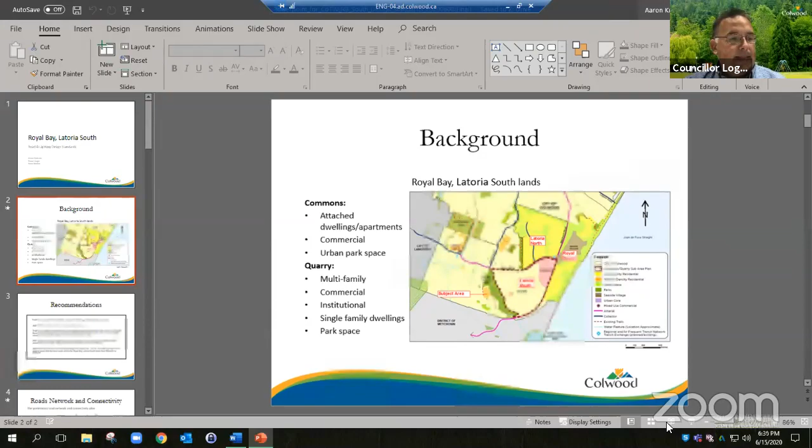It's having a little technical difficulty. It seems to want to move to my second slide. Okay. All right, yes, so I'll be presenting the Royal Bay Latoria South Design Standards. Myself and Brent Molnar will be available for questions after the presentation. So I will get started.

The developer of Royal Bay Lands is proposing specific design standards for the road design and street lighting, which will be applied to the internal road network of the Latoria South lands. The location of the lands we're speaking about tonight can be seen here in slide 2, outlined in the red dashed line. The subject lands are separated into two large areas at the moment, referred to as the Commons area and the Quarry. The Commons is intended to have attached dwellings, apartments, commercial units, and urban park space, whereas the Quarry will have single-family dwellings, attached dwellings, apartments, non-residential units such as an elementary school, and open park space.

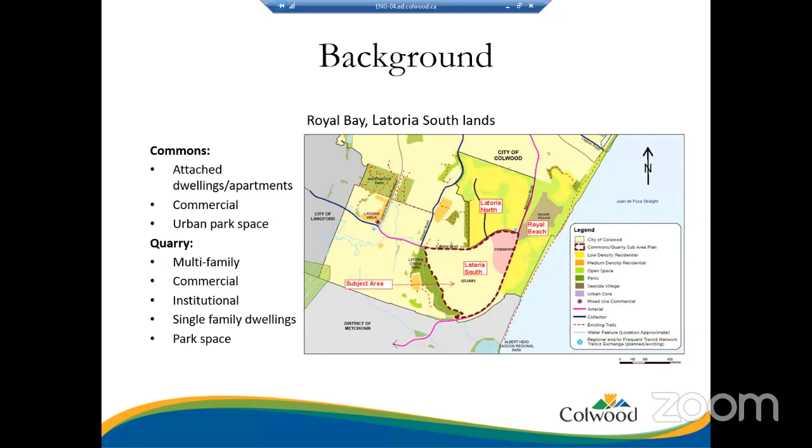Staff is recommending that the report titled Royal Bay Latoria South Design Standards be received, and that committee consider recommending to council that the road design standards and street lighting standards proposed in the June 15, 2020 staff report titled Royal Bay Latoria South Design Standards be accepted as the road and lighting standards within the Royal Bay Latoria South development lands. And that Colwood Subdivision and Development of Land Bylaw 1995, Bylaw 285, be amended to add specific design standards for Royal Bay Latoria South lands. And further that the Colwood Speed Regulation Bylaw number 1612 be amended to reduce the posted speed limit for local roads within Royal Bay Latoria South lands from 50 kilometers an hour to 40 kilometers an hour.

All right, next we move on to the road network and connectivity. The developers are proposing specific road design standards to enable the Latoria North and South lands to have a similar look and feel, to modernize the road standards, introducing more multi-use pathways, and lengthening and expanding parking areas within residential and commercial areas.

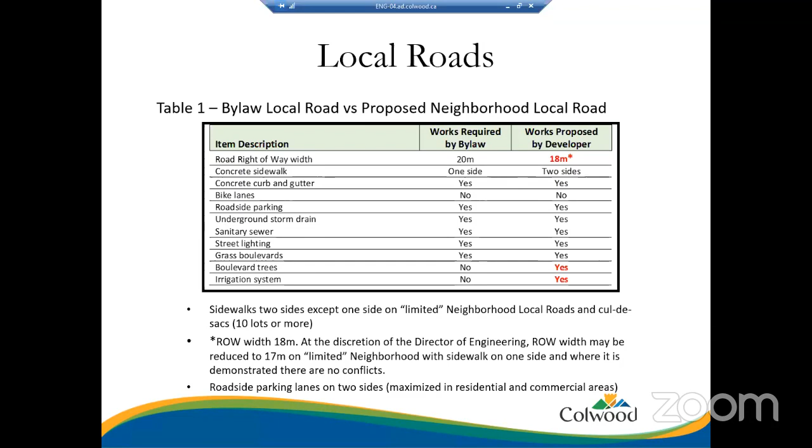So here we have the cross sections from the bylaw, as well as the proposed cross section for the local roads. You can see what I was speaking about - we've got these parking lanes here on the proposed local road, so parking on both sides, and we've got the 1.5 meter sidewalks on both sides. And then for the limited local, you would only have the one side as a 2-meter sidewalk.

And then we come to the local road cross section from the TMP. You can see that there's sidewalks on both sides at 2 meters, as well as a 6.5 meter wide roadway and 2.5 meter buffers. The buffers could imply that we could do parking on both sides, but they wouldn't necessarily be paved, or it could be a shoulder.

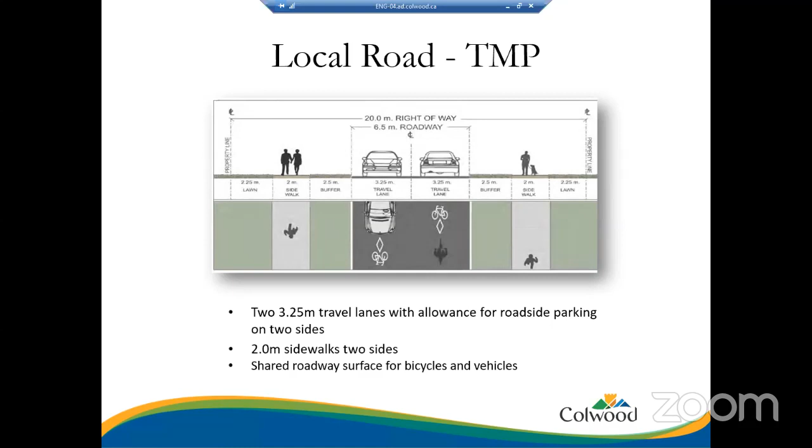Moving on to collector roads. Table 2 shows the proposed works largely meet or exceed Colwood's bylaw. They are proposing a 3.5 meter wide multi-use pathway on both sides of the road in place of the standard sidewalk and bike lanes. The multi-use pathways would consist of a 1.8 meter wide walkway and a single direction 1.7 meter bikeway, to remove some of the conflicts that can arise when you've got two bi-directional bikeways on the same side of the road. The use of multi-use pathways is supported by the Transportation Master Plan, which speaks to multi-use pathways separated from streets to encourage pedestrian and cycle activity and provide mobility choices.

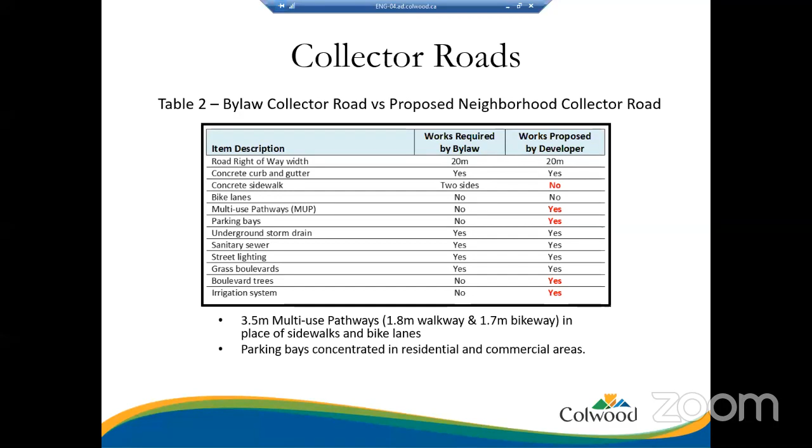The lane widths would increase from 3.3 meters standard to 3.5 meters at intersections to allow for BC Transit bus movements. As well, there would be roadside parking bays, concentrated in front of residential and commercial areas.

Here we have the collector road sections: the section from the bylaw, as well as the neighborhood collector road proposed for Royal Bay. Right off the bat, you can see the designated parking bays, divided up differently than the bylaw. The bylaw just calls for one 12-meter wide surface, with no necessarily designated parking bays or bike lanes. Here you can see the multi-use pathways, the 1.8 meter walkway and the 1.7 meter bikeway, separated by a boulevard and a curb.

Table 3 shows the works required by bylaw compared to the works proposed for a commercial collector road, which is what I earlier referred to as Commons Road, in the commercial hub of the Commons area. 2-meter sidewalks are proposed on both sides of the road. Roadside dedicated parking is proposed with angled and parallel parking types. The angled parking is intended to maximize parking in front of the storefronts for customer parking. Bikes are intended to share the road surface with vehicles, and the lane width has been increased to 3.5 meters to help accommodate that. As well, we would get boulevards with typical trees, irrigation, and allowances for street furniture.

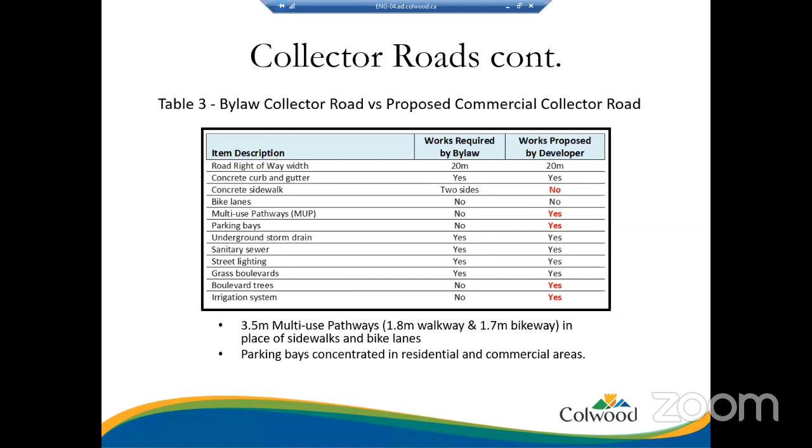So here we have the collector road again from the bylaw, but the commercial collector road cross section here shows the angled parking, and then we would still have the ability for parallel parking where applicable and where it fits, and then we would have the 2-meter sidewalks on both sides. We've asked for bollards to be provided to ensure there's no encroachment of those sidewalks from the parked vehicles. You can see here where we've widened out the lanes just a little bit more to help with that shared surface.

All right, and then we're on to the collector road from the Transportation Master Plan, which is obviously very different from the commercial proposal with the buffered bike lanes. But you get the 2-meter sidewalks on both sides, and we will have boulevards. The reason for developing the specific road standard for the commercial was really to provide an ability to close off a section of the road to host public events, like an outdoor market. So we were looking at sort of a Woonerf type feel. We tried to remove a lot of those conflicts and enable us to close off a nice wide asphalt surface, with some brick implemented into the design. So that's the reason for the special case for the cross-section for the commercial.

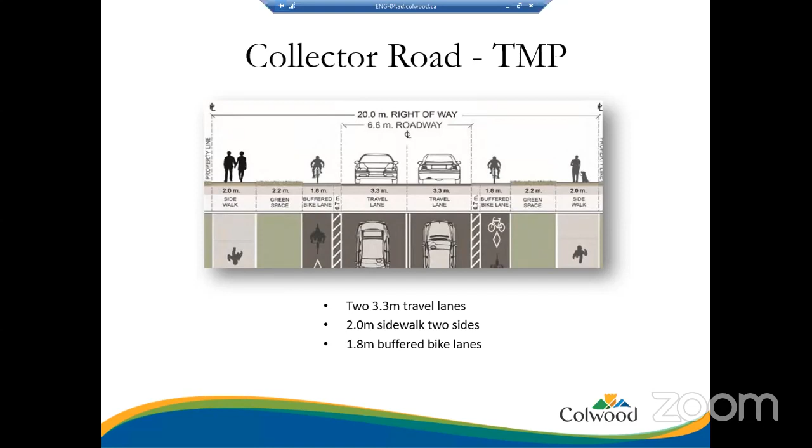Then we're moving on to table 4, where we're comparing the works for an arterial road required by bylaw versus the proposed works for a 2-lane section. You can see that the proposed works either meet or exceed the bylaw requirements. I would say the one item that's largely different is the right-of-way width. We typically require a 25-meter right-of-way for arterial roads, and the developer is proposing a 20-meter right-of-way in this case.

We have sidewalks on both sides in both cases. They're proposing bike lanes for the arterial road, where our bylaw just shows a very wide section of asphalt, without any dedicated bike lanes. And again, you get your boulevard trees and irrigation.

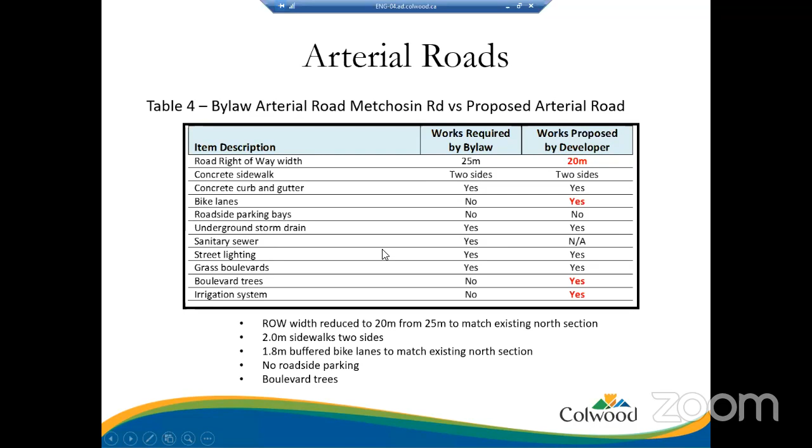And here are the cross sections for the arterial roads for the 2-lane. Here's the bylaw cross section, and that's where I was speaking to, the 14-meter wide asphalt surface. Not much delineation there. Whereas here we're going to have 2 3.3-meter lanes, the 2.5-meter buffered bike lane, so that's 1.8 meters of bike lane with a 0.7 buffer, and then you get your 2-meter sidewalks on both sides, boulevards with trees.

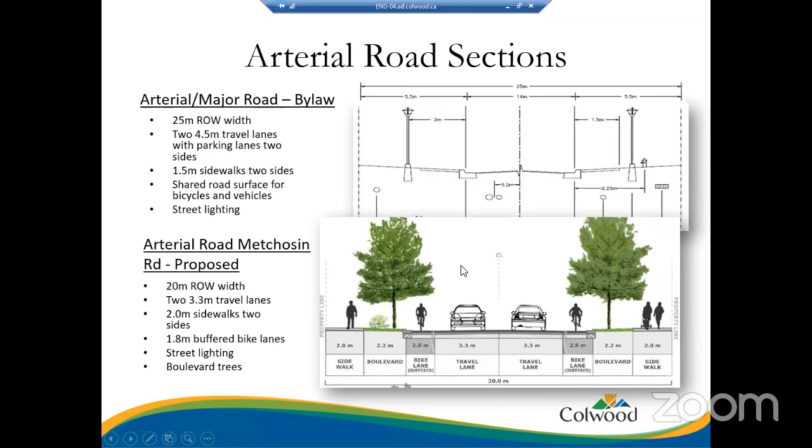And table 5, we are now comparing the required works for an arterial road versus the proposed arterial road for a 5-lane cross section. So this is basically Latoria Boulevard. We're again looking at the right-of-way width, 25 meters typical, and now we're increasing it to 27.5 meters to fit those 5 lanes.

Again, we're looking at multi-use pathways, so there's not a specific sidewalk, but there will be the 1.8 meter walkway and the 1.7 meter bikeway. We'll have a center median, which will also act as a center turn lane where necessary. The center median will have trees and mostly grass and a little bit of hard surfacing.

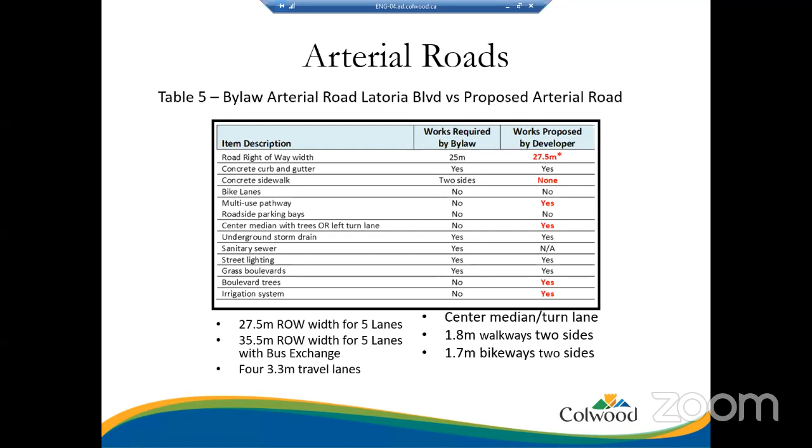This road right-of-way will have to increase to 35.5 meters, but it's only for that localized section. It's not going to be a continuous 35.5 meters.

All right, moving on to the arterial road as represented in the TMP. The 2-lane arterial above is very much like the collector road, really no difference. The bottom image here is our sort of standard 5-lane cross section. And the big difference being the outside lanes are shown as 3.1 meters, and that was because they could sort of borrow some of this space for the bike lane buffers.

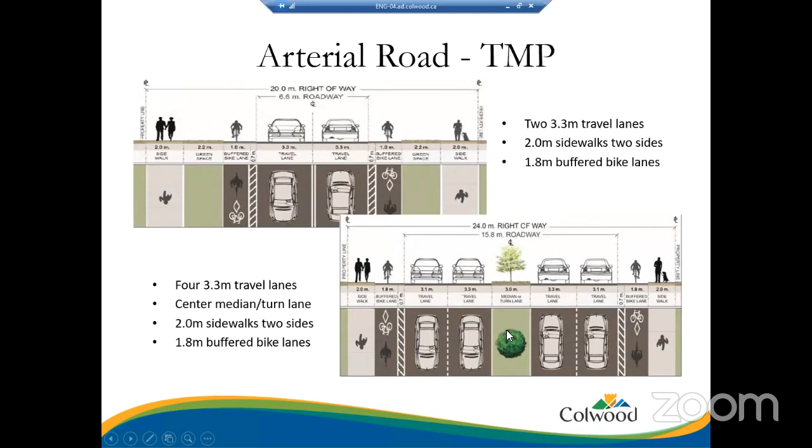Here we're now discussing the proposed changes to the speed limit on the local roads. The developer as well as staff are proposing a reduction of the local roads from the standard 50 kilometers an hour, which is specified in the Colwood bylaw number 285, to 40 kilometers an hour for the through local roads. So that would be the main local, as well as the limited locals and the cul-de-sacs.

They would all be 40 kilometers an hour. Now they would have to be signed as 40 kilometers an hour. As well, we would require a bylaw amendment, I believe it's bylaw number 1612, to change the standard specified speed limit for local roads within the Royal Bay lands specifically.

In discussions with staff, we've come to the understanding that other municipalities in Victoria and Saanich are considering or have already implemented some changes to reduce speed limits within neighborhood local roads to 40 kilometers an hour and even 30 kilometers an hour in some cases.

We're supporting the proposal to change the speed limits to help with reducing speeds within the neighborhoods and to sort of balance out the speed of the vehicle and the cyclist, so there's less conflict. As well, it would help with pedestrians crossing the road and such. I think that's it for the speed limit changes.

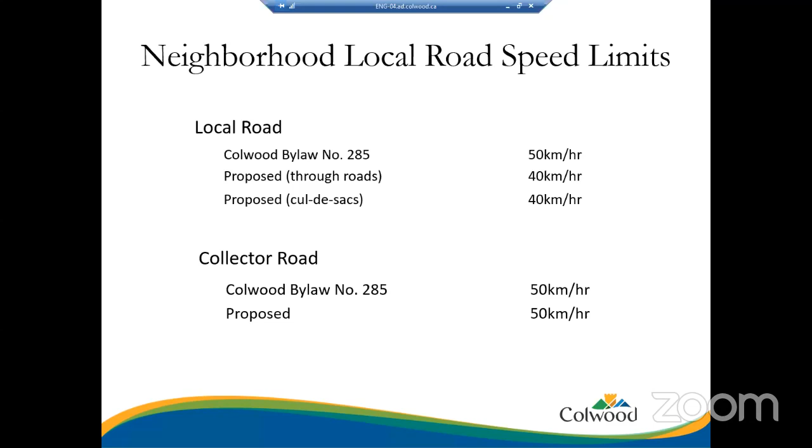Now we're moving on to the street lighting. Royal Bay actually has been using Lumec LED street lighting on the Northlands for some time now. They were accepted through the design standards approval for the Northlands. However, the lighting standards were never formally inserted into a bylaw.

So staff would like to take this opportunity to include the lighting standards now in with the Royal Bay Latoria South standards. The color of the poles will be the black blue that has been used already in the Northlands and throughout Colwood.

So staff can make the following conclusions from the proposed design standards. The proposed road design standards largely meet Colwood's intent for the transportation master plan, as well as the official community plan, by providing safer sidewalks with multi-use pathways, improved pedestrian and cycling connectivity, and different mobility choices for the community. The design standards would be specific to Royal Bay Latoria Southlands and added to the bylaw as an appendix or schedule.

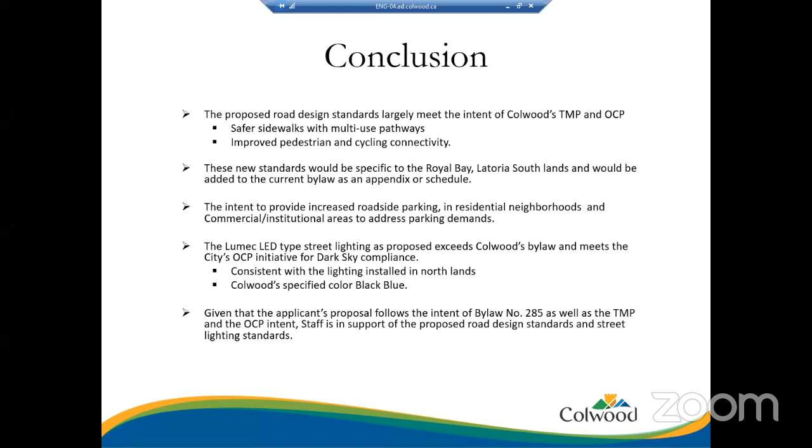So in closing, I'd just like to repeat the options and alternatives available to us. We're looking to direct staff to approve the proposed road design standards and street lighting standards as provided in Appendix A, Royal Bay Latoria South Design Standards.

And direct staff to draft an amendment to Colwood Subdivision and Development of Land Bylaw 1995, bylaw number 285, as amended, by adding the specific design standards for the Royal Bay Latoria Southlands to the bylaw as an appendix or schedule, and direct staff to draft an amendment to Colwood Speed Regulation Bylaw number 1612 by reducing the speed limit for local roads within the Royal Bay Latoria Southlands from 50 kilometers an hour to 40 kilometers an hour, specific to the Royal Bay Latoria Southlands.

Or alternatively, the proposed road design standards and lighting standards not be accepted as the road design standards within the Royal Bay Latoria South development lands, and the Transportation Master Plan be applied as the road design standards instead. And direct staff to maintain the 50 kilometer an hour speed limit specified in the Speed Regulation Bylaw number 1612 for the local roads within Royal Bay Southlands.

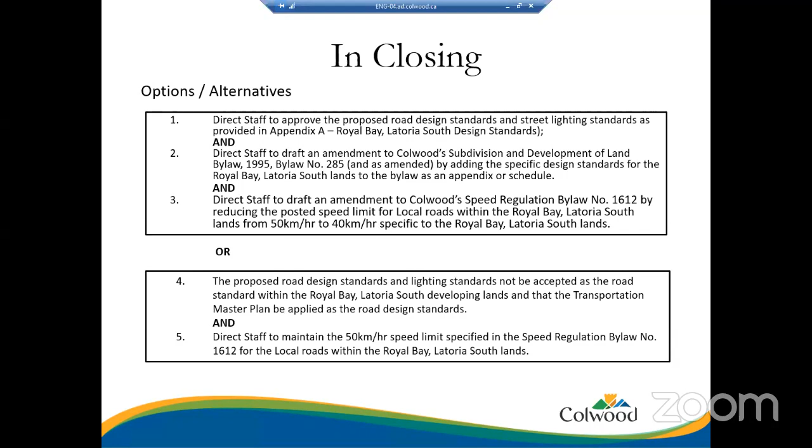I'd like to point out that we actually have Ben Mycroft, Lance Fleur from Gablecraft, Matt Pike from On Point, and Dan Huang from Urban Systems, who are all available on the call for questions, if there's any questions at this time.

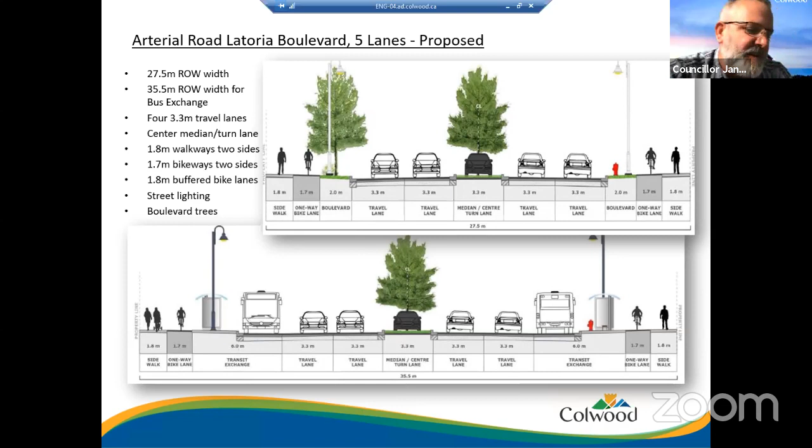Sorry, Councillor Jansen, I see that Ben Mycroft has his hand up. He might be able to answer. Sounds great. Ben?

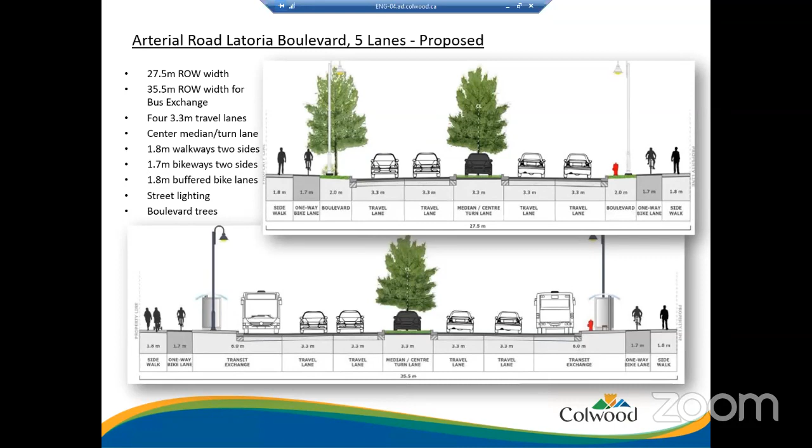Yes, thanks, Chair Logan. I just wanted to make a comment in response to Councillor Jansen's comment and question around the planters. We've heard from the public clearly that the maintenance on those has been challenging. And so what we've done is on the south side, on the Ryder extension, we've actually converted all of what would have been planters over to parking. So now we've got parking on both sides instead of just on the one side, which I think is contributing to the parking issue there in front of the school. And so we're just trying to maximize all our parking opportunities now.

I saw that in some of the diagrams, and I think that even if it ends up being overbuilt for a number of years, I think that will pay dividends into the future when we are attracting more commerce down to that area.

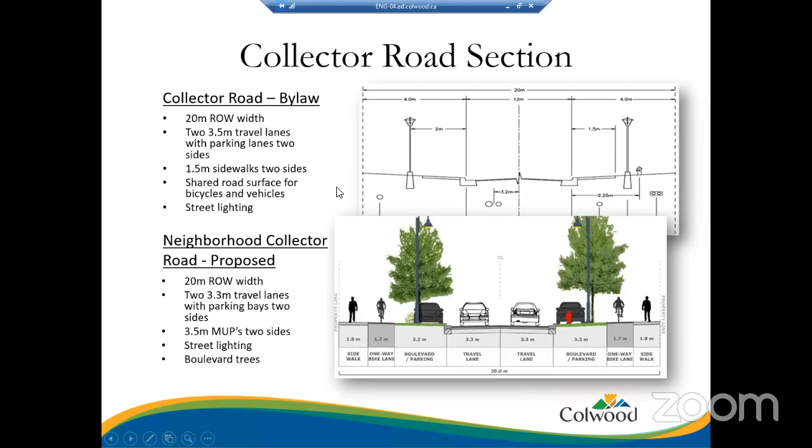Yeah, and that's the reason why we've got through the commons, we've got this section all wrapping through the commons roads, and that's to allow for significant on-street parking opportunities, basically to be a sort of surge parking capacity for some of the off-street parking. In case there's any worries, it's just having a lot of parking in that commercial area. It seemed to be important.

That's great. I appreciate that.

Now this next bit, I'm not sure who we throw this at, Chair Logan, but I start to get concerned when we're reducing the widths down to, I see 17 meters, and I'll tell you my concern.

Councillor Logan and I were walking just last night down in the Caspian area, enjoying the neighborhood. It was replete with children and pets and people walking, and it was a lovely evening with no wind.

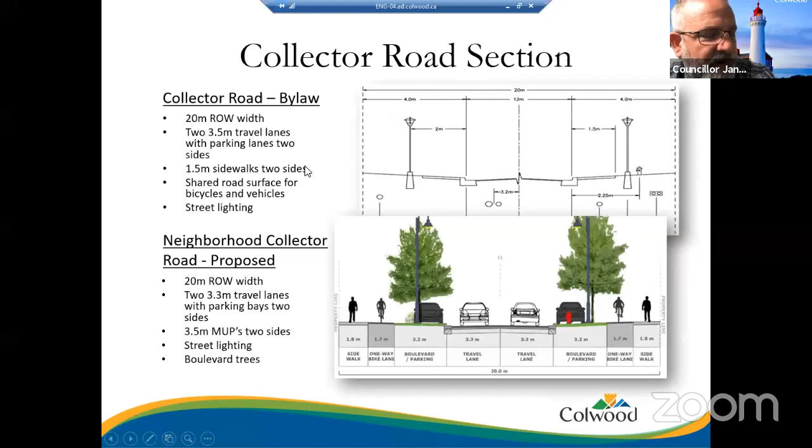What we found or encountered was parking on both sides of the road, which is great. However, my concern is if we get down to as narrow as 17 meters with parking on both sides of the road, I'm going to bet that we would have a tough time navigating a piece of fire apparatus, especially the tower truck, through that confined space.

And then the other piece is, as we get narrower, visibility for drivers becomes restricted. I think it's more a cautionary note than anything else, because I do like all of these proposals, but I think maybe that's a message for Brent. I think when we're getting down to 17 meters, we're getting fairly narrow.

Thanks, Councillor Jansen. I see both Brent and Matt Pike wish to speak. So Brent, did you want to go first?

Thank you very much, and through the chair, Councillor Jansen, thanks for your concern. Road standards on local roads have been reduced in other areas to lower than 17, but regardless, your concern is definitely noted. One of the factors we address at intersections is making sure we don't have situations too tight. Plus, we run through all of the lanes, intersections, and cul-de-sacs with our fire truck turning movements to demonstrate that they can be made.

And as we go forward and continue to develop not only the works but the cross sections as they're applied, that's exactly what the consulting engineer will be providing. We'll take that to Fire Chief Cassidy for his comment and query as well. Got it, thank you.

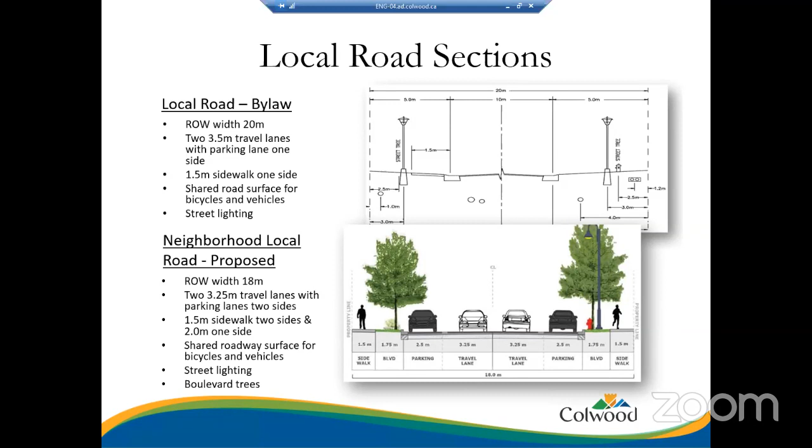My concern with that is that there are several communities within Colwood, for example, the Esquimalt Lagoon area, who have made several requests to the city to lower speed limits on Lagoon, on Milburn, on Heatherbell, down to 40. Part of the rationale for not doing that was that there was a financial consequence to doing that. So I'm concerned about changing some areas within Colwood to mirror that, but not allowing other areas suffering the same sort of issues to have us do the same. I would prefer that we stay consistent throughout the entire city. If we feel like we need to drop road standard speeds in one specific area, I think we should be doing them wherever the community believes it should occur.

So that also means that with this amendment that Councillor Jansen's moved, we would also need to sign the cul-de-sacs down to 30, correct? Correct. Yeah, I'm all done for now.

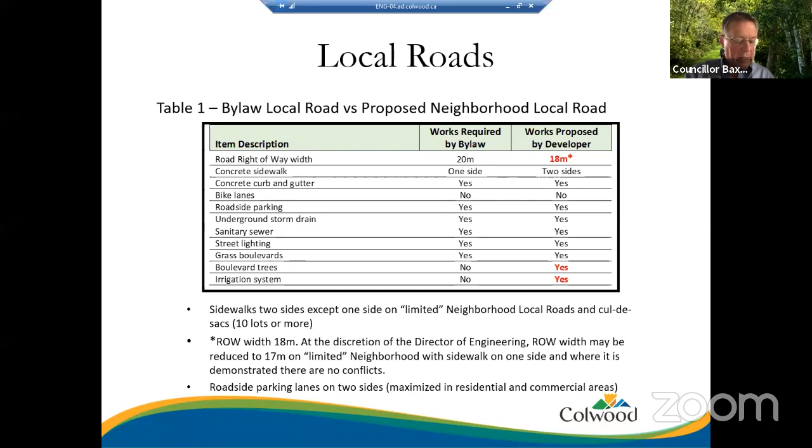In the meantime, there is a slight difference between the cross-section that is local road 18m right-of-way proposed by Royal Bay and the actual cross-section drawn by Royal Bay, which is called Neighborhood Local Road. The difference is, well, I guess the one drawn by Royal Bay shows that they are doing parking bays on the plan view, but the cross section doesn't say that. Whereas every other cross section says boulevard / parking. So I thought that meant on the local road we weren't having any pullouts, but I think that's just the way it's denoted, not the way it's intended. Am I right there, Brent? You are correct. Thank you.

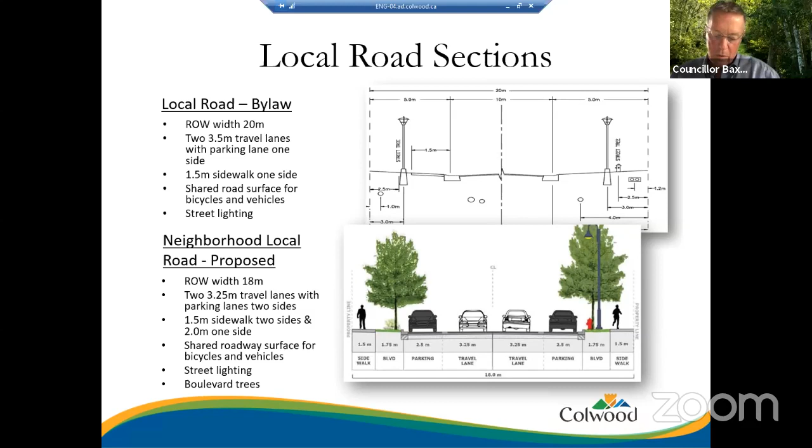Pardon me while I get to my next page. I'm looking at the Commons Road, and the lanes are 3.5 meter lanes, which aren't generally considered large enough for shared roads with sharrows, but there's no other bike lane. So are we intending that the bikes would travel within the 3.5 along with the cars?

Through the chair, yes, the Commons Road is intended to be a very, very localized, high conflict zone that brings focus not only onto the users of the street, but the pedestrians and the business frontage. And the road is being designed in such a way that we can actually shut it down, put bollards in the roadway and have street festivals and events. It's supposed to feel, I'm struggling for the term, but it is supposed to have a fair bit of conflict and a bit of mingling and almost a woonerf design, as Aaron said, where the cyclists are part of the roadway. It's very, very low volume, very, very low speed.

Yeah, that's true. There's a lot to see there in the commercial area, and that helps people slow down.

I'm sorry to stray over the property line again, but it affects what's in the road right of way. The buildings, the commercial buildings in that area, is there any intention that they would be built right up to the property line?

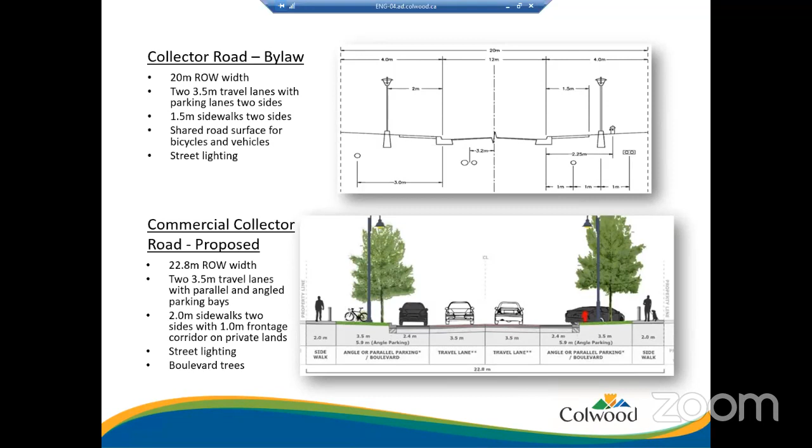The reason that interacts with what's in the right of way is that normally, fronting a commercial building, you would have a 3-meter sidewalk, which allows for benches and bits of street furniture, and also can help if the building wants spillover seating for a restaurant or coffee shop, something that in the age of COVID people are more interested in. So I'd be proposing we increase the 2-meter sidewalk on that road to 3 meters, and I'd like to make an amendment that on both sides of that cross section we go for a 3-meter sidewalk as befitting a commercial street with properties fronting the road.

Thank you, Councillor Baxter. On the amendment, I've got 3 people that want to speak to that. Brent, did you want to start first? And we'll go to Ben Mycroft and then Matt Pike.

Definitely, thank you very much. Through the chair, one interesting way with building designs is that you can end up getting increased sidewalk space by allowing the awnings to come over. If they're permanent to the building, it has to form outside of the active right of way. That's something we've talked to Ben about. So while the buildings are going to be tight to the perceived public realm, there should leave room for a bit of public spillover.

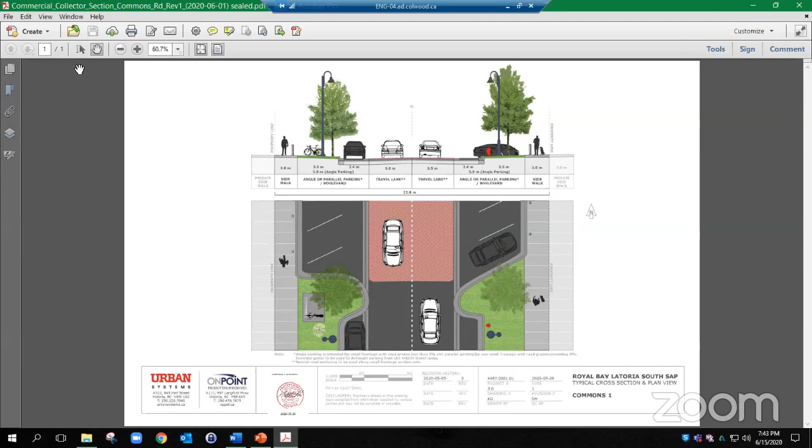I'd like to ask if Ben Mycroft would like to add something to this conversation. I think he's got a fair bit. Yeah, Ben's hand is up. Ben?

Thank you. Brent, this is what I was hoping you would show, this plan view. I believe this is in the agenda package. We've put quite a bit of thought and back and forth with the city on this section—enabling parallel parking just in the limited area where we've got the retail storefront, so we can make those retail units successful, especially in this challenging retail time. As well as doing what Councillor Baxter was noting, our proposal was to allow—we're sort of at odds with trying to keep buildings enclosed. From a planning perspective we want them pretty tight, so you don't have undefined wide open space. It's nice to feel enclosed by the buildings, but at the same time allow for that sidewalk area for things like street furniture and a cafe to spill out onto the sidewalk. So we've allowed for a 1-meter private sidewalk rather than a 3, but we've got the same idea in mind.

Oh, I see that ghosted in there now, I hadn't noticed that before. Okay, well it wasn't—this is in the addendum section of the package, so they didn't show this in the earlier presentation. Yeah, okay, thank you for that clarification.

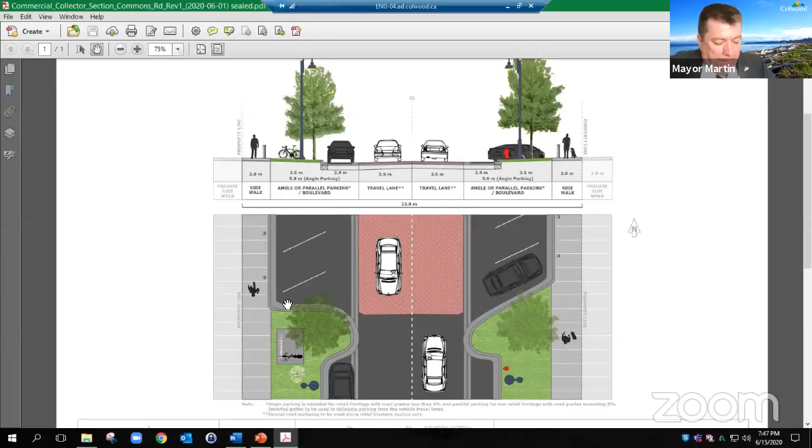Mayor Martin: If you're ready to call the question, Chair, I'm going to ask that you sever the speed out of that. I'd like to have two votes, please. Can you sever and further that this Colwood speed regulation bylaw number 1612 be dealt with at the end of the motion - I'd like that severed off, with two votes please.

I was going to mention, because there was a lot of discussion about the 30, if someone wanted to make an amendment - but if you'd prefer to have it severed, I'm not supporting either, so if somebody else... Okay, I'm happy to sever it.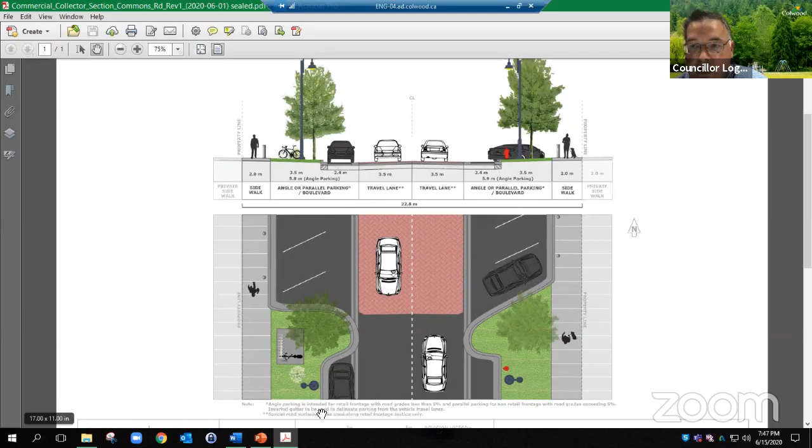The only thing I'd highlight in addition to tonight's discussion is, although council hasn't discussed the uses of Playfield Park yet, we anticipate some partnership with the school district and Gablecraft in developing that park. We should really think about the parking along the park side of that strip, and perhaps consider maximizing the amount of parking adjacent to the park by eliminating the planted boulevard and having angled parking, as an example. I just throw that out as something we should be sensitive about.

So with that, I will call the question on the recommendation on the floor, minus the 'and further that this Colwood speed regulation bylaw 1612 be amended' portion, which will be a separate motion. Those opposed to the motion? Not seeing anybody opposed.

And on the second part of the motion, with the addition of the 30K in cul-de-sacs - Mayor Martin? Sorry, I was just voting. Councillor Baxter, did you have any discussion on that? Yeah, I just wanted to be clear - the vote we're taking right now is just on the 30. The 40 is already decided.

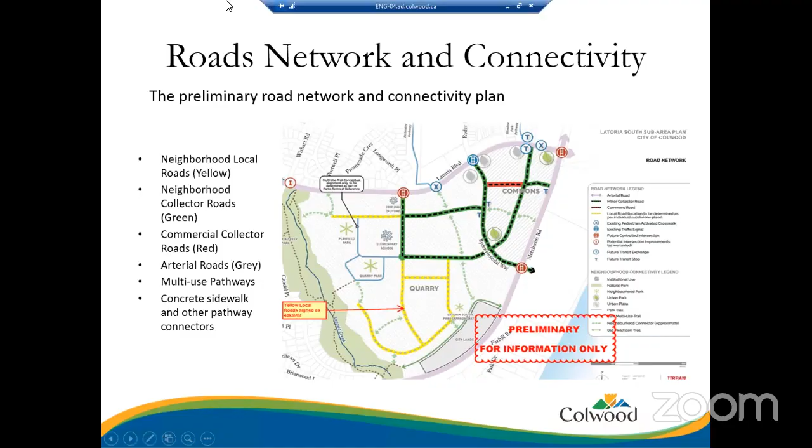Point of order? What's your point of order? Don't we have to actually now vote on the original, since you separated it? Like, should we be voting on the 40 now? We just did. Okay, I'm getting confused, sorry. No problem, Doug. Okay then, through the chair, am I okay to keep going? Go for it, yeah. Okay, thank you very much.

There's no PowerPoint tonight, but we've got our Public Works team here with Rob Boyle, Gord Bouvier, and John Russell to answer any questions council may have. The intention of this report is to bring forward the RFP consideration for Latoria Creek Stairs. Gord, John, would you like to add anything? Based on our RFP, we had a really clear way forward in terms of which contractor suited us best, and we're really looking for direction to explore using more renewable or longer lasting construction materials.

Part of the issue we experienced with the RFP, because of the poor timing with COVID, is that they weren't able to get information or quotes on materials that would extend the life of the stairs. Instead, they presented a lot of options with wood, which is a good viable option, but we'd like to see some options to reduce life cycle costing. So this report summarizes a couple options we could do: either proceed with the wood and basic construction, or look at more diverse options to extend the life of the stairs.

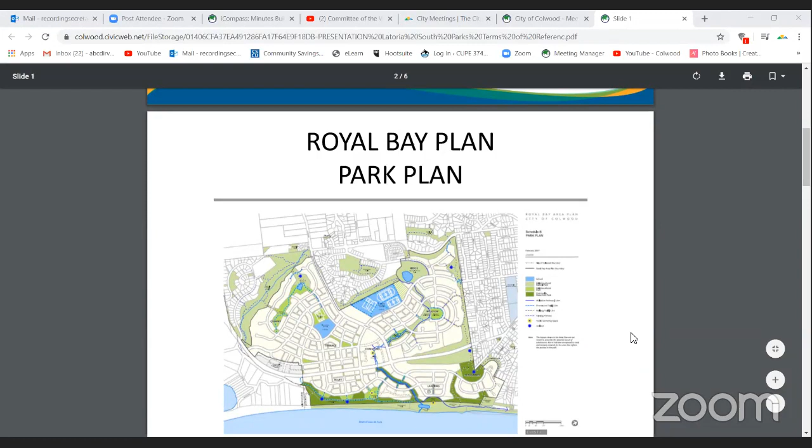The majority of Quarry Park was identified as a neighborhood park, and the neighborhood park is identified as a managed park that provides opportunity for a range of active and passive activities. This plan did show connections through Latoria South, as we now call it, to the school, onto the commons, which is this area here, and then connecting through to the Latoria North through the park system that's currently under construction. Next slide please, Amanda.

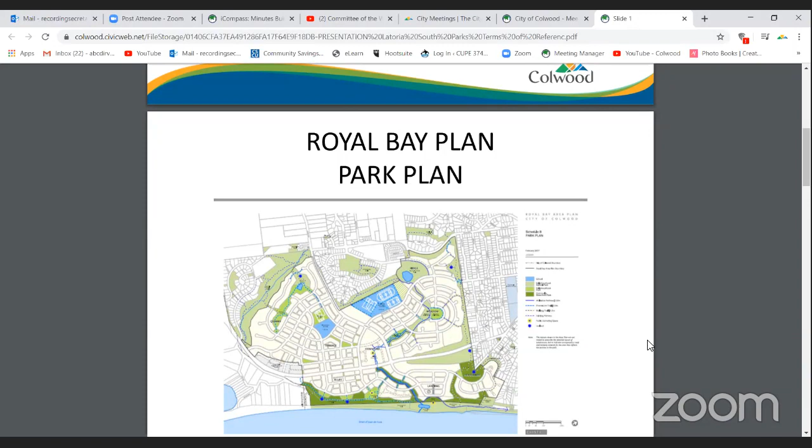The proposed plan for Latoria South reconfigures the park area somewhat based on the proposed location of the school. In addition, it adds approximately 1.2 hectares to Latoria Creek Park, which is this area identified in slightly darker color here. There's still the pathway connections to Latoria Creek Park and also to the rest of the Quarry neighborhood and through the commons, largely through the street connection systems and the path connection systems that were shown to you earlier as part of the street classification. In addition, through the commons, which is this area in here, they're proposing some parkettes and also some public plazas in and around through this development.

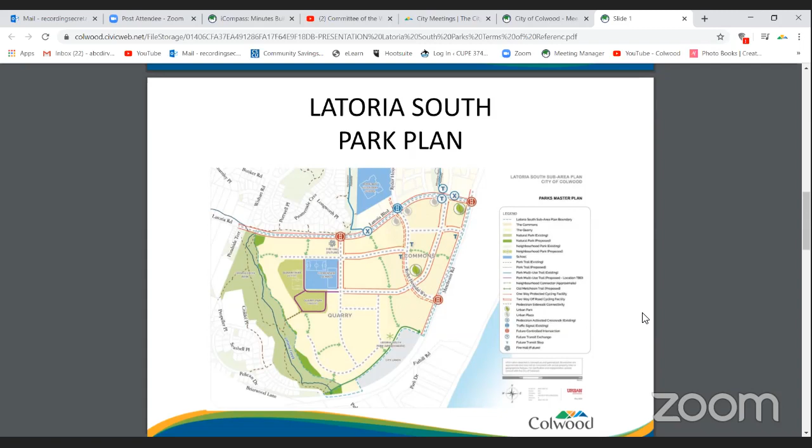Next screen please, Amanda. It's important to note that the amount of park space is largely unchanged. The Royal Bay plan estimate for Latoria South was approximately 7 hectares. They are proposing essentially the same amount of park space, both for neighborhood natural park and also for neighborhood park. Next slide please, Amanda.

The park's terms of reference, which we've highlighted here, the major components, will also include major elements that will be the foundation of the parks plan that will be developed for Latoria South. As I mentioned earlier, it will be applying the user-friendly trail toolkit, and also very important is estimating the cost of annual maintenance. I should point out that this process is very much paralleled after the process that we use for Latoria North, and to date has been a very successful process.

Based on the terms of reference that are adopted by council, a more detailed park concept will be forwarded to council for consideration. We would expect this would happen sometime after the adoption of the bylaws regarding this application.

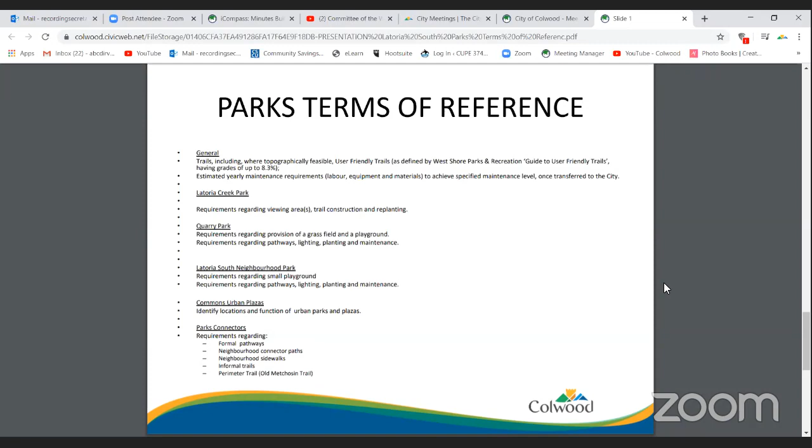So finally, the staff recommendation is that the park's terms of reference, as appended to the staff report, be adopted or recommended for adoption by council, and that the terms of reference also be included as part of that. The other important part of the staff recommendation, largely in response to a request from the applicant, is that there be a staff report back to council to consider applying a portion of the amenity contributions generated by the development in Latoria South towards specific parks improvements in Latoria South. Staff suggest this would come back to council at a later date with recommendations as to how this could happen, should council wish. That essentially includes the staff presentation.